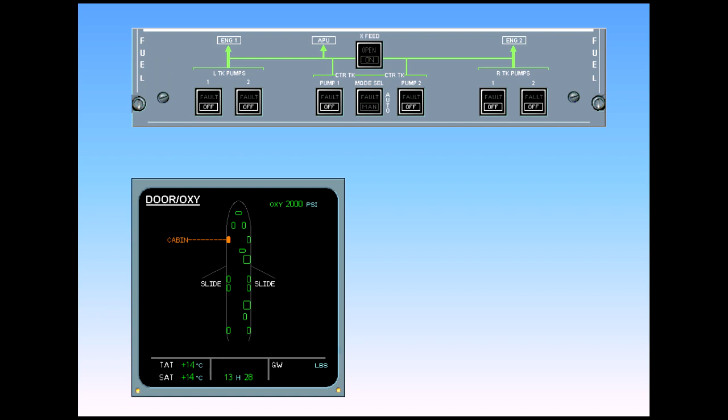We will now discuss items related to the fuel system that you will encounter during cockpit preparation. With the pumps in the off position, observe the symbology on the ECAM. The pumps are cross-line amber.

The fuel pumps are switched on during initial cockpit preparation, lights out philosophy. Switch on the number 1 pump in the left tank and observe the ECAM indications. On the ECAM fuel page, the number 1 pump in the left tank illuminates inline green, indicating that the pump is running.

Continue by switching on the number 2 pump in the left tank. The left tank pump 2 is now also running. Click on the forward arrow to finish switching the center and right tank pumps on. All the pumps are now running.

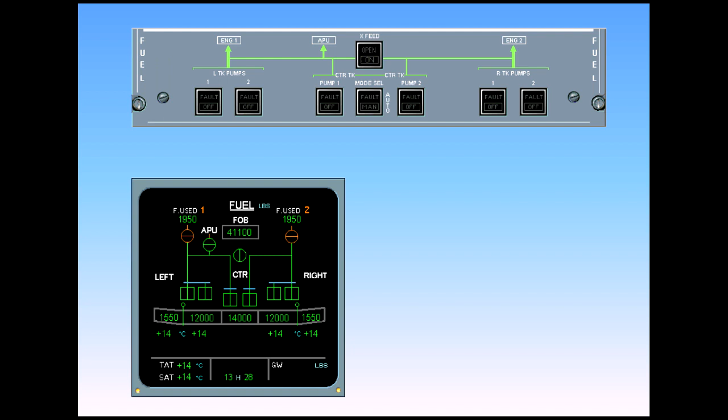Now you notice a new message on the checklist portion of the engine warning display. The message "Refueling" is displayed on the engine warning display, indicating that the refuel control panel door is open. Once refueling is complete, you will verify the fuel distribution in the tanks.

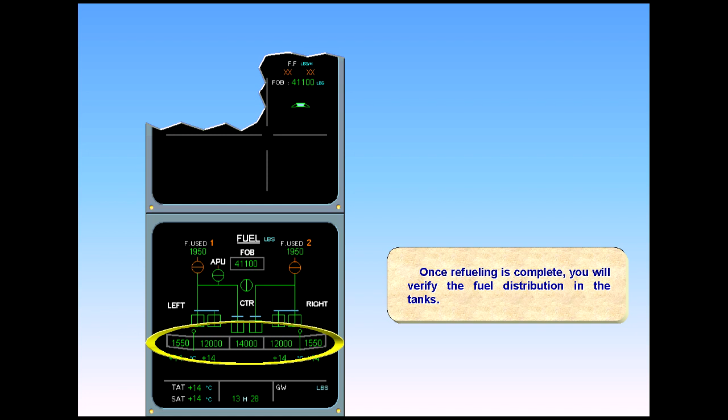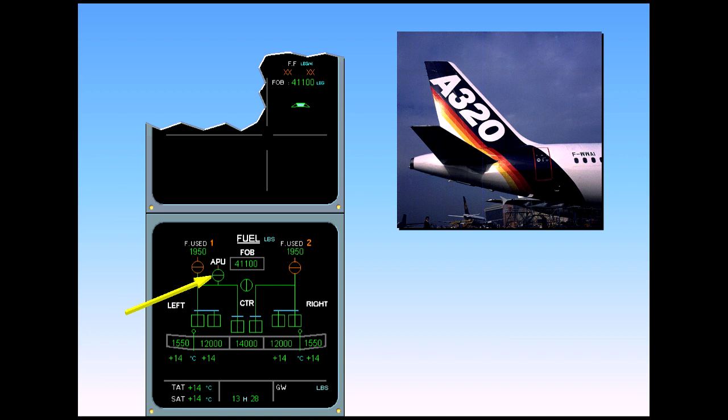It's now time to start the APU. Before starting, notice that the APU low-pressure valve is closed, cross-line green, and the fuel line downstream from the low-pressure valve is amber, indicating the APU is not running.

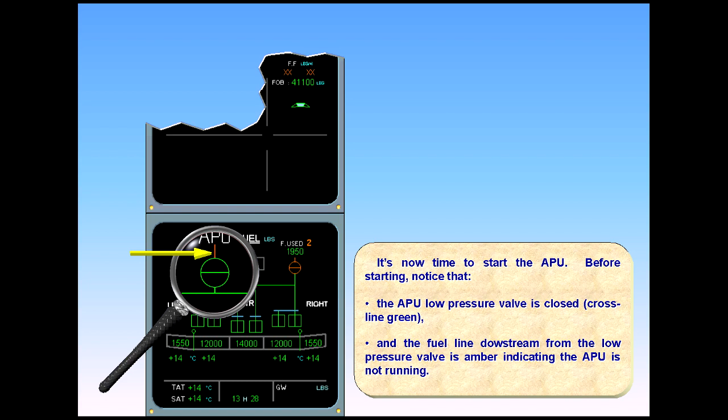The APU is now running. On the ECAM fuel page, you can see the APU low-pressure valve has opened, inline green, and the fuel line downstream is green.

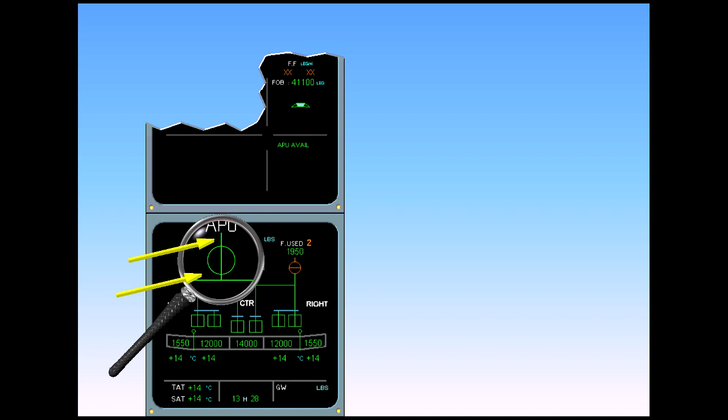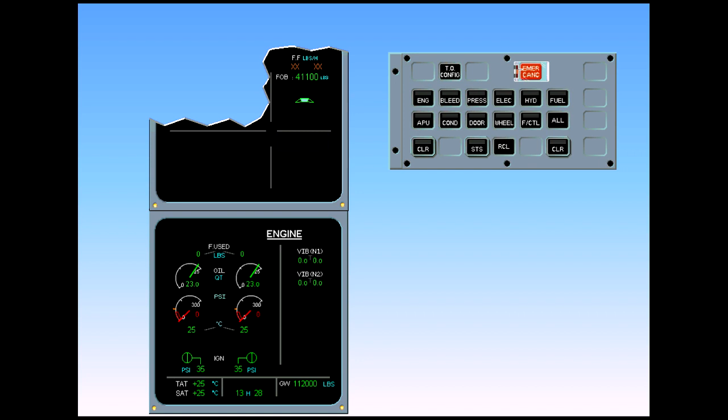During engine start, the ECAM engine page is automatically displayed. However, to illustrate what occurs in the fuel system, the ECAM fuel page has been selected.

Before we start the engine, observe the following. The engine low-pressure valves are cross-line amber to indicate closure. The fuel used quantities remain from the previous flight.

Engine identification numbers are amber. This is because the engines are not running. On the engine warning display, the fuel flow, FF, indicates amber crosses.

Engine 2 is starting. Observe the low-pressure valve is inline green. Fuel used indication automatically resets to 0. On the engine warning display, fuel flow starts. Engine identification number 2 changes to white.

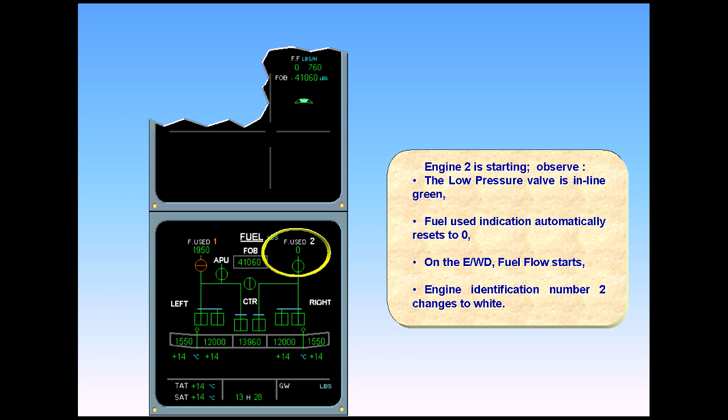Engine 2 is starting. Observe the LP valve is inline green. Fuel used indication automatically resets to 0. On the EWD, fuel flow starts. Engine identification number 2 changes to white.

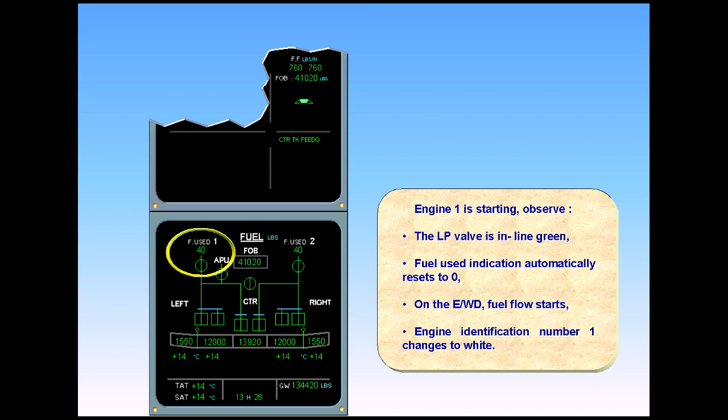Notice that the gross weight, GW, has now appeared. This indication becomes available after engine start.

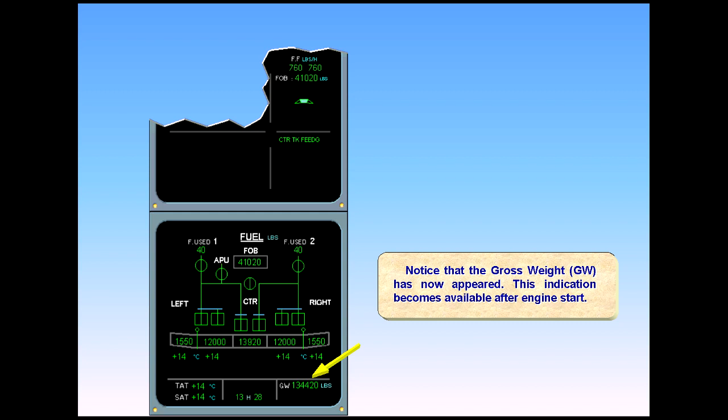Observe the message, Center Tank Feeding, in the memo area of the EWD. A 2-minute timer is activated after engine start, and is restarted after the second engine is running. The center tank pumps will operate for this time, and will automatically shut down after 2 minutes if slats are extended. If slats are not extended, the center tank pumps will run indefinitely, provided there is fuel in the center tanks.

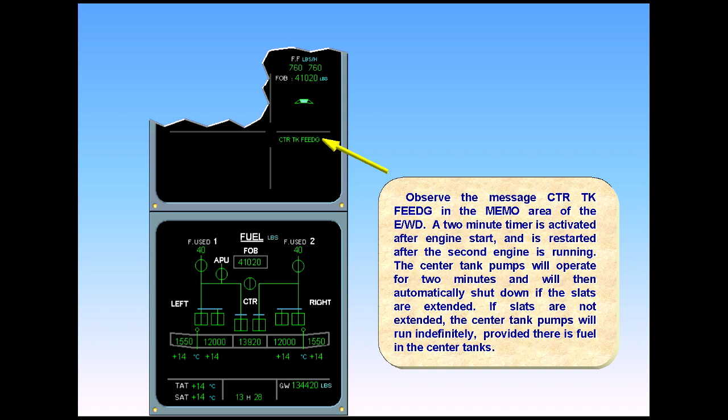The items related to the engine start are complete. We will now discuss items related to the fuel system that you will encounter during taxi.

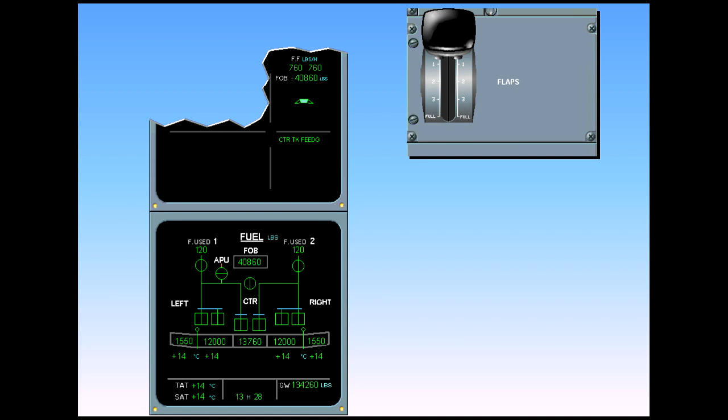When the slats are extended, one of the automatic functions of the center tank is activated. Notice that the Mode Select push-button switch is set to Auto. Lights out.

Observe, the flaps are extending. 2 minutes after the second engine start, the message Center Tank Feeding disappears. On the ECAM fuel page, the center tank pumps are cross-line green, indicating that they have stopped running automatically. The main wing tank pumps now feed the engines for takeoff.

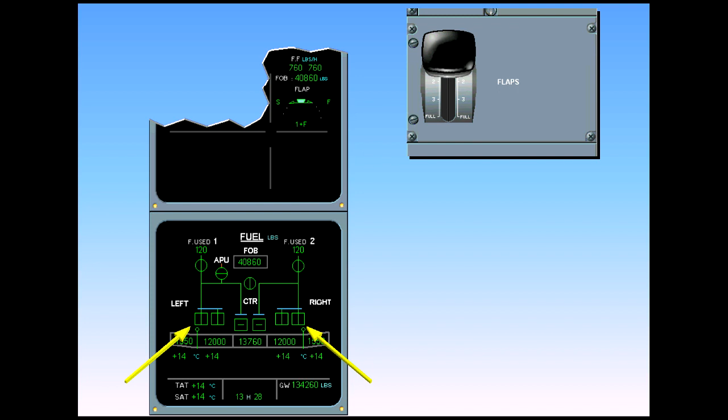The items related to taxi are complete. We will now discuss items related to the fuel system that you will encounter during normal climb, cruise, and descent.

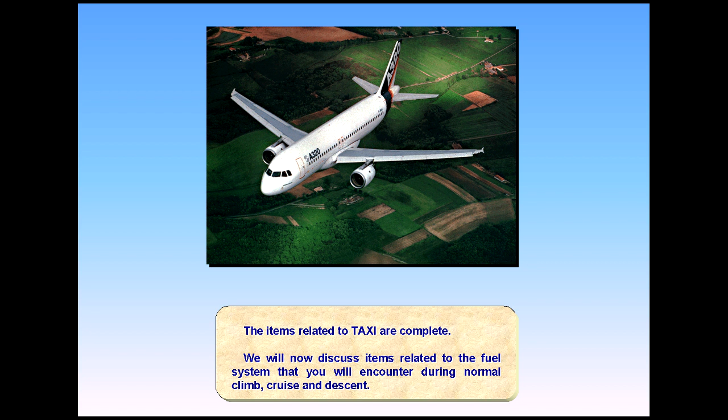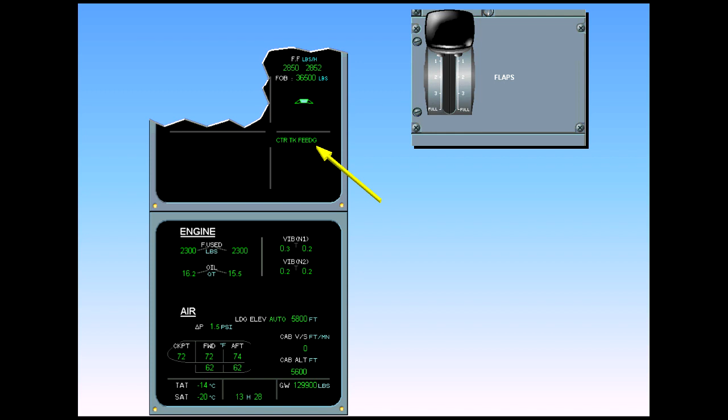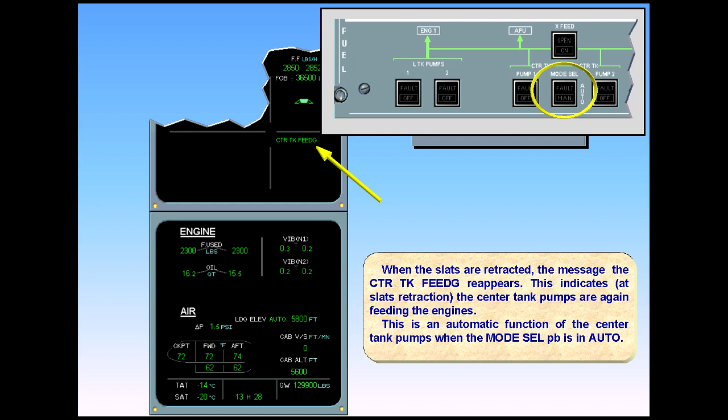When the slats are retracted, the message Center Tank Feeding reappears. This indicates at slats retraction, the center tank pumps are again feeding the engines. This is an automatic function of the center tank pumps when the Mode Select push button is in auto. Observe the corresponding pump indications on the ECAM, inline green.

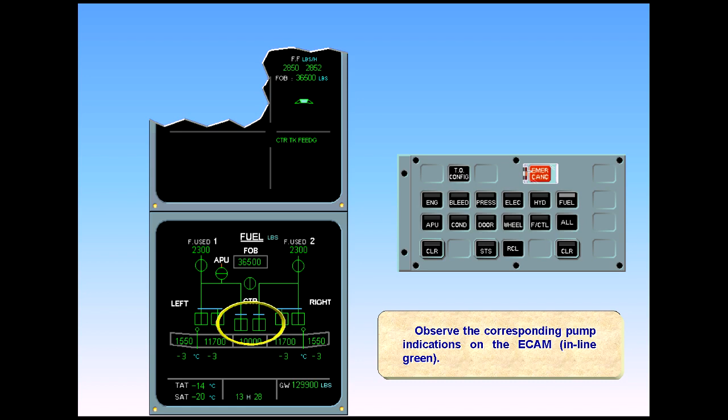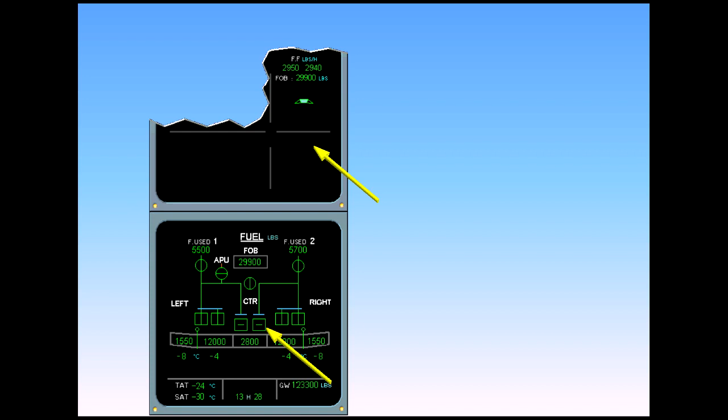You are now in cruise. Notice the center tank feeding message has again disappeared, indicating that the center tank pumps have automatically shut off. However, the center tank is not empty, and an auto function has again occurred. To explain why, we must look at fuel recirculation.

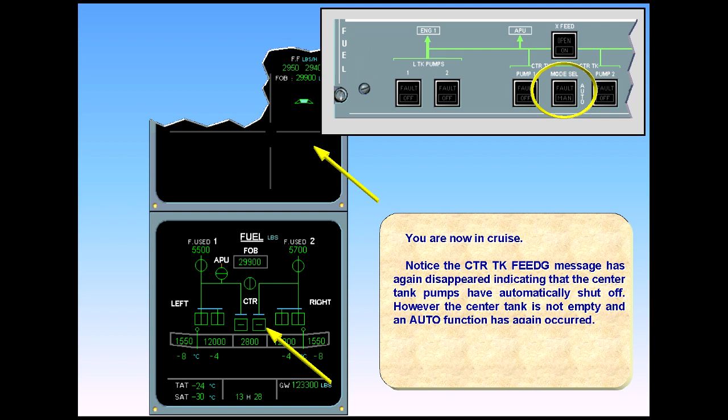Some fuel to the engines is diverted to cool the integrated drive generators, IDGs, then returns to the wing tanks. If the engines are fed from the center tank and the wing tanks are full, the center tank pumps automatically shut off. The inner tank pumps take over and feed the engines so that there is room for fuel from the IDGs.

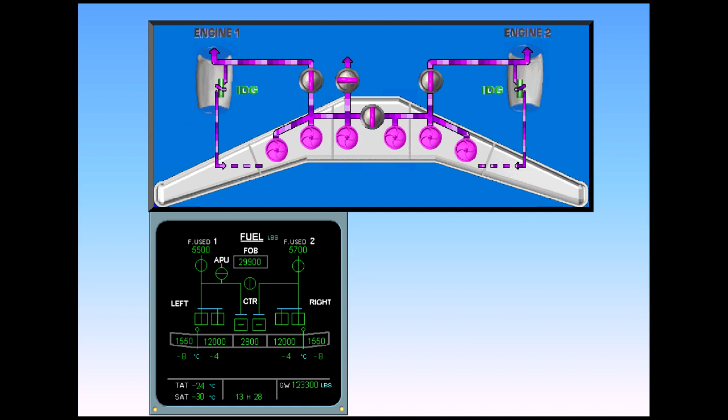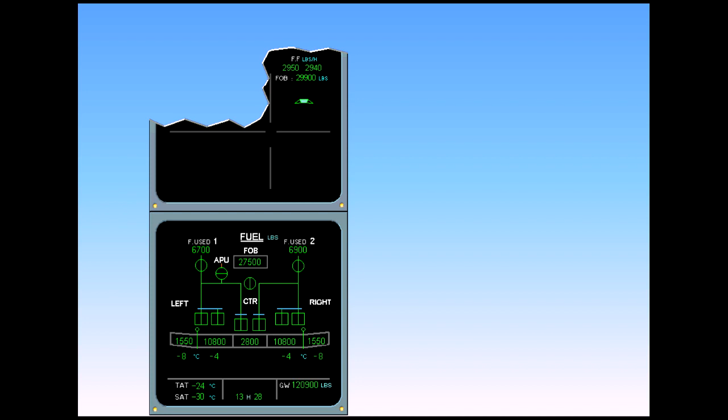After the inner tank pumps have fed approximately 1,100 pounds of fuel, the center tank pumps automatically restart.

The following illustration regarding the opening of the transfer valves is incorrect. The valves do not open until a low-level sensor detects 1,650 pounds of fuel remaining in that tank. The sequence is shown only because it does show the automatic operation of the transfer valves.

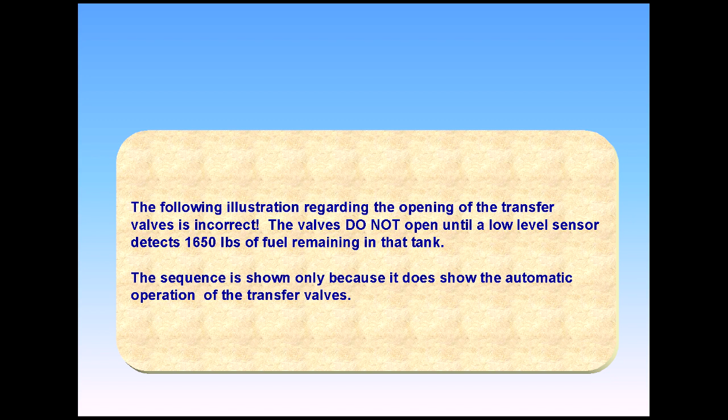You are in descent. To better illustrate the remaining indications, we will keep the ECAM fuel page displayed. The center tank pumps have automatically shut off, cross-line green, because the center tank is empty. The inner tanks are now again feeding the engines.

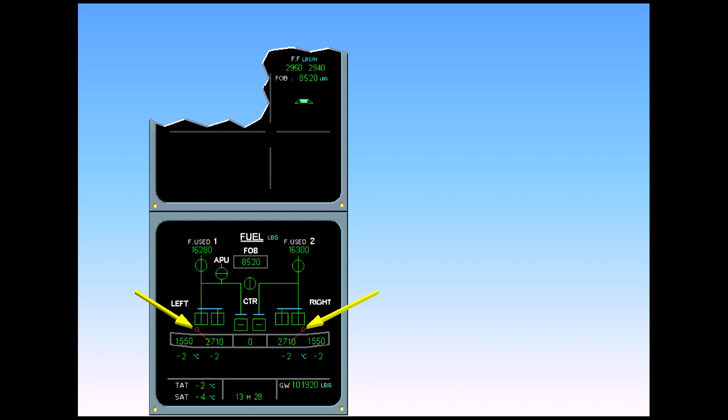Let's see what happens when the inner tanks reach a low level. When either inner tank reaches a low-level limit, both transfer valves open automatically, transferring fuel from the outer to the inner tanks.

After at least one transfer valve is open, the message "Outer Tank Fuel Transferred" is displayed on the engine warning display.